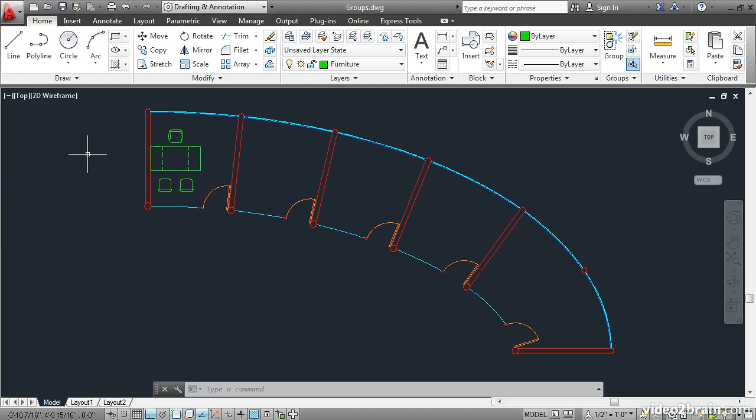Groups are an organizational feature that facilitate transforming related objects together. In this lesson, you will group a collection of furniture blocks and then distribute them into a number of offices. Open the Groups project file to begin. Then zoom in on this office.

These are separate blocks. Because I want to have the same collection of blocks in each office, it makes sense to first group them together prior to copying them. I'll click the large Group button here in the Group panel, select the 4 blocks, and press Enter.

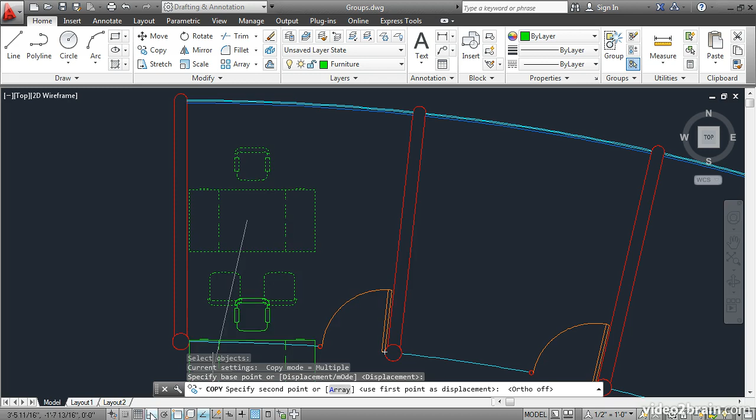If you hover the cursor over the group, the entire thing highlights. Even though it says Block Reference in the tooltip, it really is a group. Click Copy, select the grouped objects, press Enter, and place a copy in each office. Turn off ortho if you need to, so that you can place them in this fashion.

Then zoom in on the next office here, and we need to rotate this group so that it more closely parallels the angle of this wall. Select the group, and you'll see that it has a single grip. Click the grip and press the spacebar twice to cycle to the Rotate command. And then estimate the rotation so that the edge of the desk is roughly parallel to the red wall.

Then go back and click the grip and stretch it over so that it's just about at the wall. It's not perfect, but it's probably close enough for the furniture. I'll press Escape to deselect the group. If you want to make a perfect rotation, you can do it in this way.

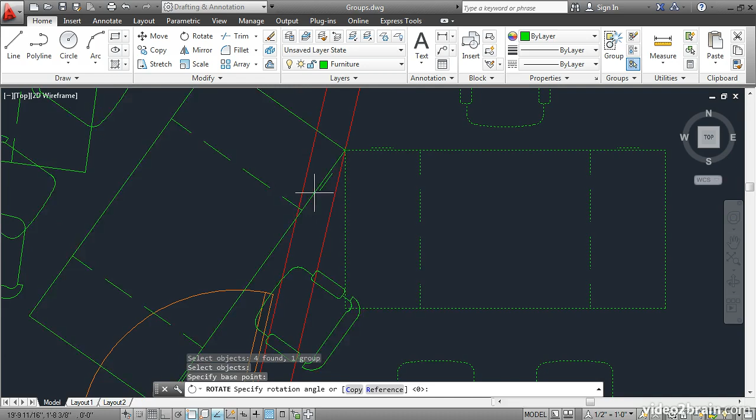Move the group, Enter, from this endpoint to some point along the wall. I'll snap to the midpoint. Then rotate the group, Enter, from that same point, and then use the reference option. The reference angle will begin here at the base point, and it will go down here and snap to the desk, and then the new angle will snap to the wall.

So that is precise. But now we need to move the group back along the angle of the wall. Instead of finding out what that is numerically, it's easier to change the coordinate system to align with the wall object. Type UCS Enter for User Coordinate System. Click the Object option and click on the wall.

Turn on Ortho and move the group back. I'll move it away from the wall 1 inch to give it some breathing room. And then I'll type UCS Enter, Enter to accept the default option of World. That returns us to the original coordinate system.

Let's go ahead and adjust the next office. Here I will select it, use the grip, press the spacebar twice to cycle to rotate, turn off ortho, and rotate the group just by estimating it visually. And then I'll go ahead and click the grip again and stretch it over here and place it down.

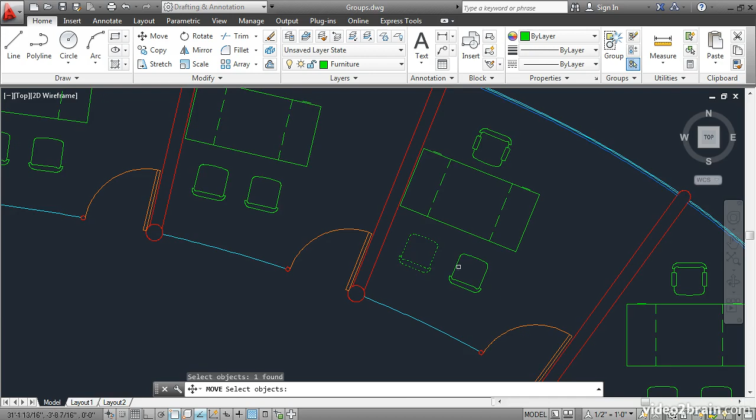Now let's say in this particular office I want to move the chairs back away from the desk a little bit. To do that, I will click Ungroup. So now the group structure is gone and we have the original blocks. I can then move these chairs however I want. I'll just move them back a little bit.

Over here, let's try this in a different way. Let's select this group, click its grip, press the spacebar twice to cycle to the Rotate command. Rotate the desk approximately, and then click the grip again and stretch it over a bit. Now in this case, let's say that I want to have an extra chair over here because this room is bigger.

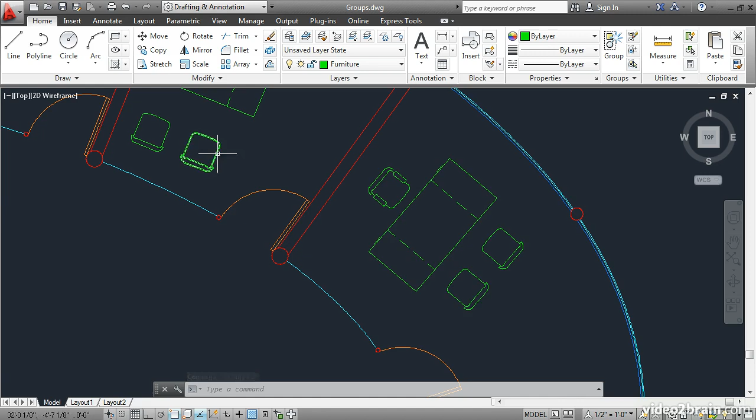Instead of ungrouping, let's temporarily turn off the group selection by clicking this button. Now, I'll press Escape. Now look, these are separate blocks again. So are these. In fact, you can't select any of the groups on the screen at all right now. It's almost like they were never there.

Let's go ahead and make a copy of this chair. Place it over here someplace. And then perhaps we need to move all 3 chairs over, about like this.

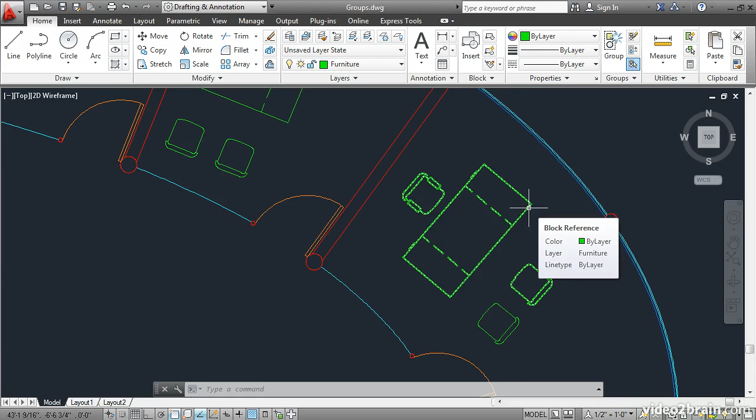Now I'll toggle group selection back on, and you can see the group still exists. It was just toggled off temporarily. There's no group here because we ungrouped it, but all of these others are still grouped. Now down here, the copied object is not part of the group. We can add it to the group very easily with this tool.

The command line says Select Group, and then it gives you the option to add or remove or rename the group. I'll click Add Objects, select this object, and press Enter. Incidentally, there's no reason to name groups. AutoCAD handles this internally, so you can use groups informally to create data structures so that you can transform related objects together.

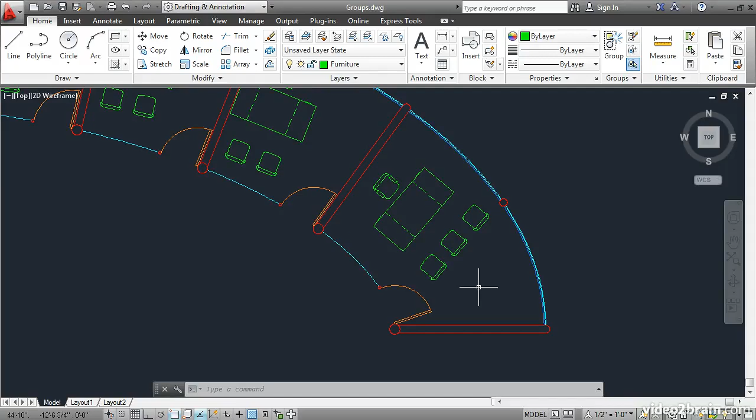You have learned now how to group and ungroup objects, how to add an additional object to a group, and how to temporarily suspend group selection.